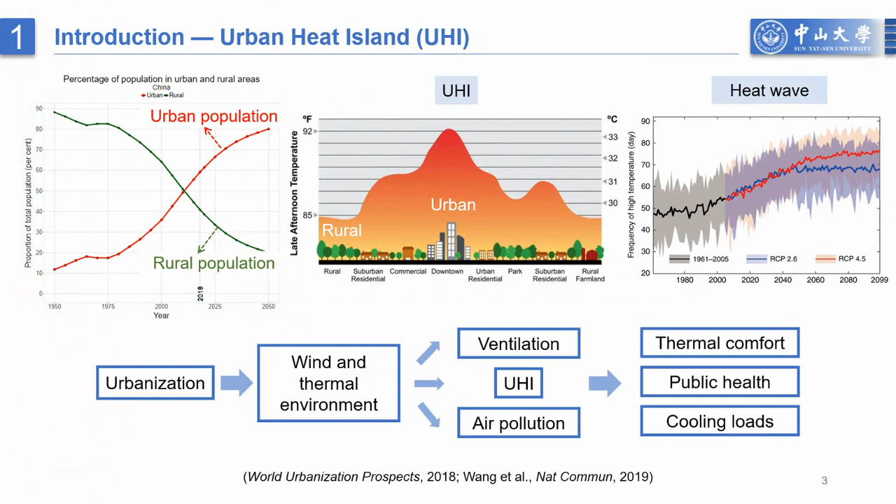I will start from the background. Because the seminar is about urban heat mitigation, you may know the background very well. Here I want to emphasize the impact of urbanization with the increasing population, which not only increases the urban temperature but also decreases the urban wind. The urban heat island also increases the frequency and the intensity of summer heat waves, which decreases the thermal comfort in urban areas and increases the building cooling load at the same time.

Then how to mitigate the urban heat island? Increase shading, increase the urban ventilation, increase water availability, planting trees. All of them have the potential to mitigate. In this study, they want to know how the cool surface mitigates the urban heat island, specifically the cool wall and the cool roof. The cool materials refer to the materials with high solar radiation reflectance and high emissivity, which allow them to absorb less short-wave radiation and emit more long-wave radiation.

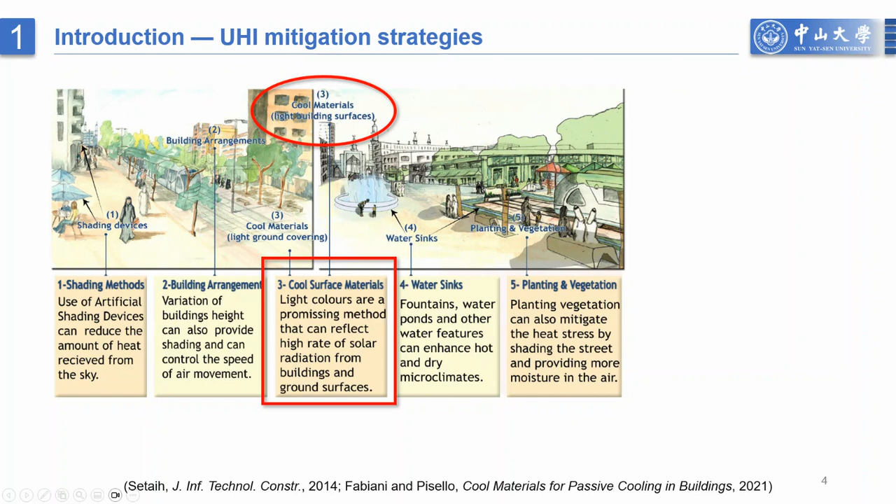Many previous studies have shown that the cool materials can reduce the air temperature, but by how much? And most of them emphasize cool roofs only, while for high-rise buildings, the effect of the cool roof is just not enough. So this study focused on both cool roofs and cool walls. Particular attention was on the deep street canyon. The low-level building walls are sheltered from direct solar radiation, thus applying cool materials at the low level of the building may not be necessary.

They further investigate the partially cool-coated wall, including about 25% cool wall and 50% cool wall in the upper level. Three different times were considered, including 9 o'clock in the morning, 12 noon and 3 o'clock in the afternoon. And they also investigate two street canyon aspect ratios, a typical one with aspect ratio of 1 and a deep street canyon with a very large aspect ratio of 5.

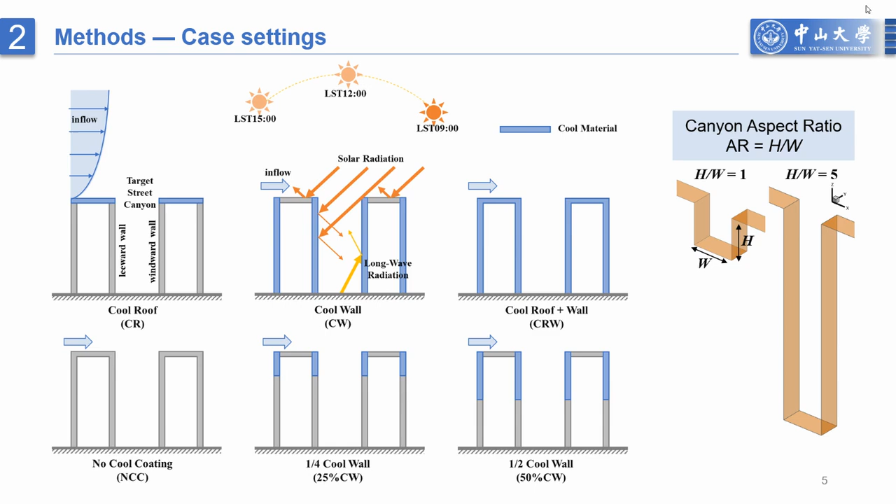They use ANSYS Fluent to simulate the wind and the temperature field in idealized 2D full-scale street canyons. The computational domain is shown in the figure at the left side. The width of the street canyon is about 24 meters, and the distance from the building roof to the domain top is about 120 meters. The turbulence was solved by the standard k-epsilon model in this study, and the radiation was solved by the P1 radiation model. The position is Guangzhou, China, and the simulation time is September, which is autumn in China.

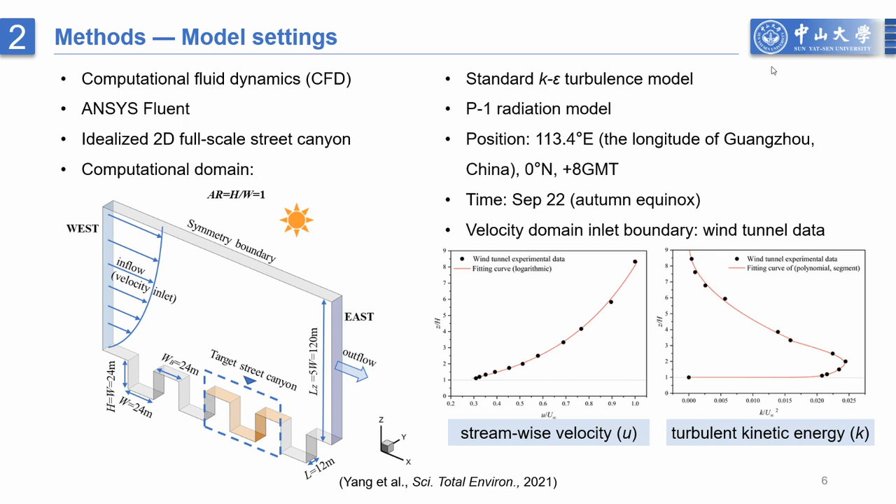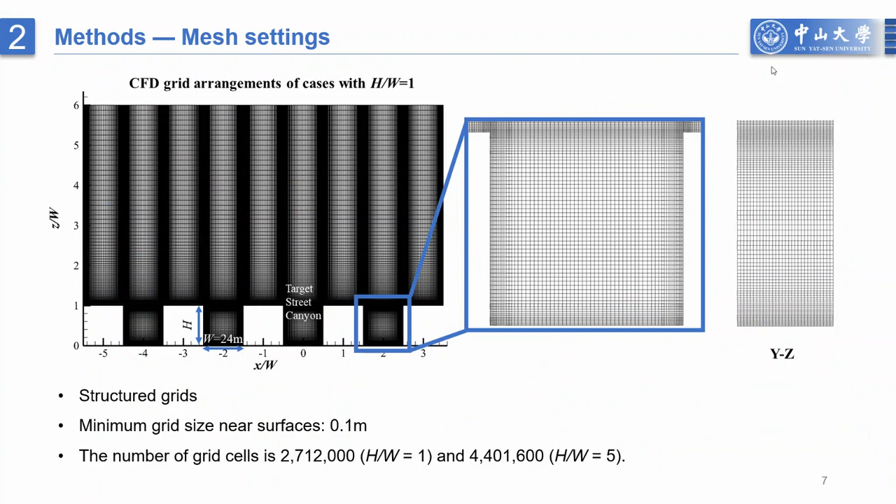For the velocity domain inlet, they use the atmospheric boundary layer for the velocity and for the turbulent kinetic energy. And they use a very refined mesh, particularly in the near-wall region. The minimum grid size near the building and the ground surface is set to about 0.1 meters because they want to capture the small variation near the walls. In total, 2 to 4 million grids were used in this very simple model. This table lists the physical properties of building and ground materials applied in this study. The thermal properties are from the scaled outdoor experiment I will show you later. They mainly change the absorptivity of the material to change the access of solar radiation to the cool materials.

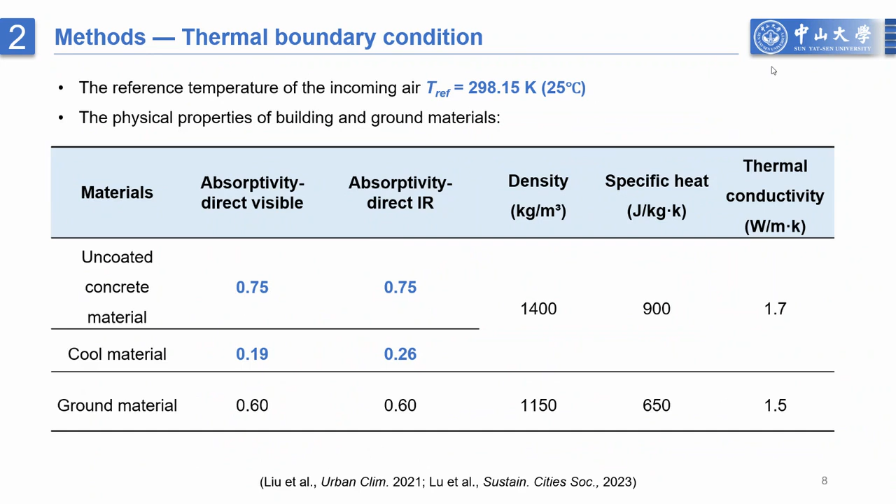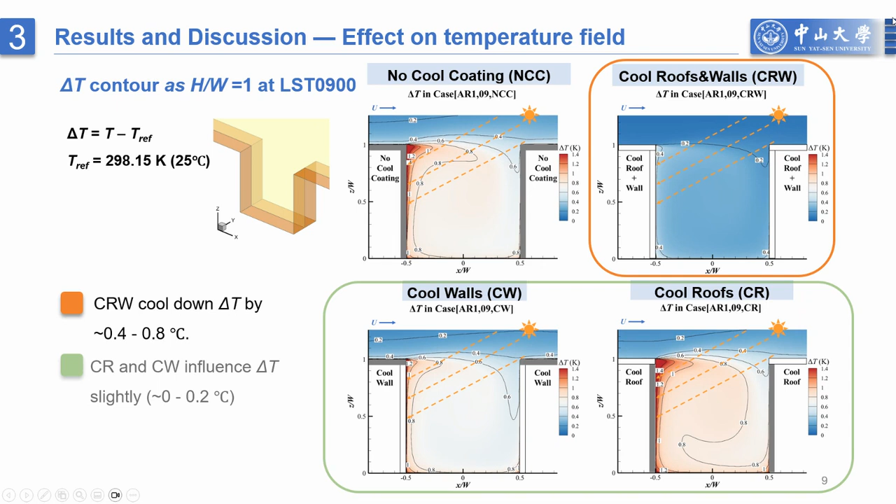So this part shows the results of the simulation. These are contours of the in-canyon air temperature. In the case with aspect ratio of 1 at 9 o'clock in the morning, compared with the no cool coating cases, the benchmark cases, when we use cool materials at both the roof and wall, the air temperature will decrease by 0.4 to 0.8 degrees, while when we only use cool roofs or cool walls, the cooling effect is very small, and when we combine them together, they are not as good as cooling both walls and roofs at the same time. Sorry.

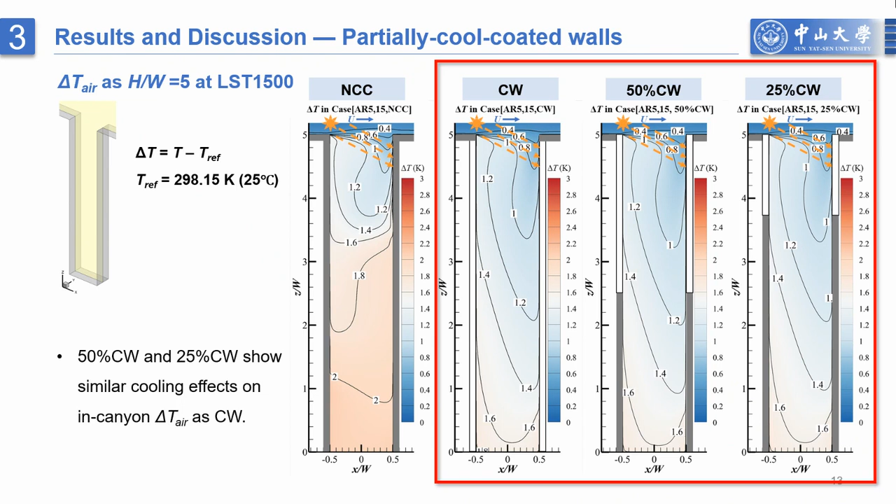For the very deep street canyon with the aspect ratio of 5, it can be seen that the cool wall only decreases the surface temperature of the wall that is directly heated by the solar radiation. But as the street canyon becomes deeper, the proportion of the area directly heated by solar radiation is smaller. So they further investigate the cooling effect of partially cool-coated walls. That means in the wall, some area is painted with cool materials, some are not. And we can find that compared with the no cool coating case, the 50% cool-coated wall and 25% cool-coated wall both show a similar cooling effect on the in-canyon air temperature as the entire cool-coated wall.

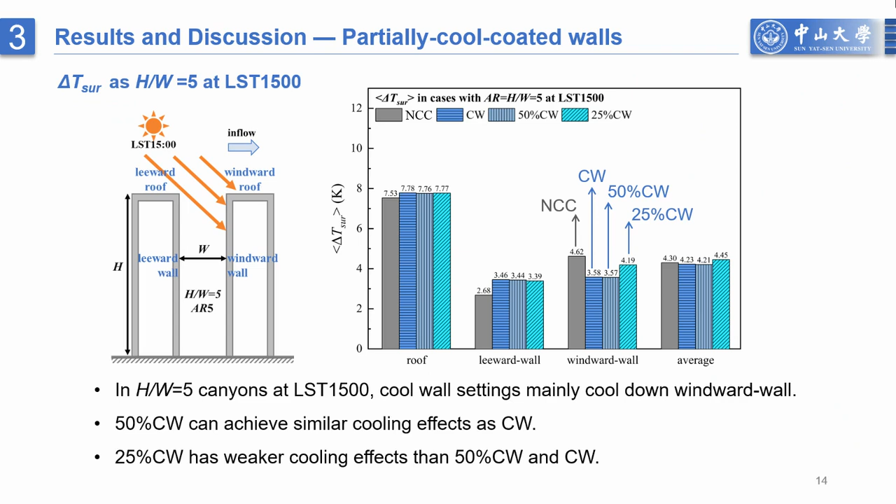The figure shows that in the deep street canyon at 3 o'clock in the afternoon, the cool wall settings mainly cool down the windward wall, and the partially coated wall can achieve a similar cooling effect as if we cool all the surface from the top to the ground level.

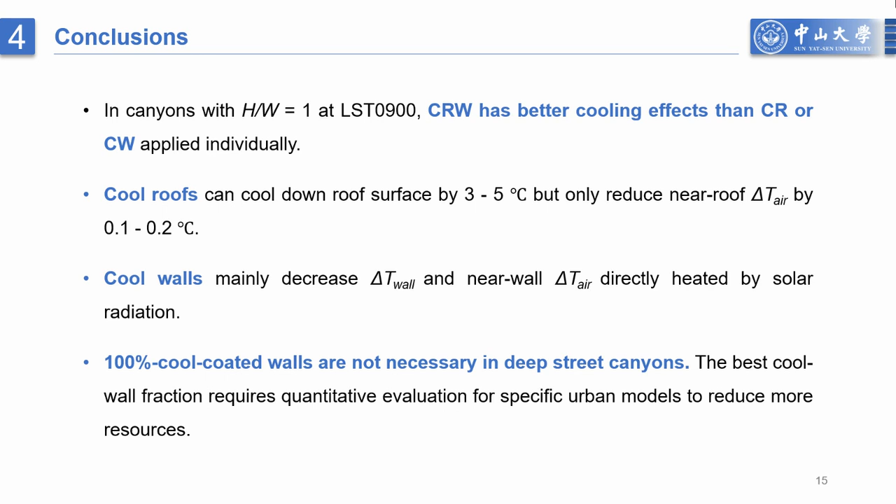Okay, here comes the conclusion. Coupling cool roofs and cool walls has a better cooling effect than just cool roofs or cool walls individually. Cool roofs can decrease the roof surface temperature by 3 to 5 degrees, but only slightly decrease the near-roof air temperature by 0.1 to 0.2 degrees. Cool walls mainly cool down the wall surface and the near-wall air around the area directly heated by solar radiation. And the entire cool-coated wall is not necessary in a very deep street canyon.

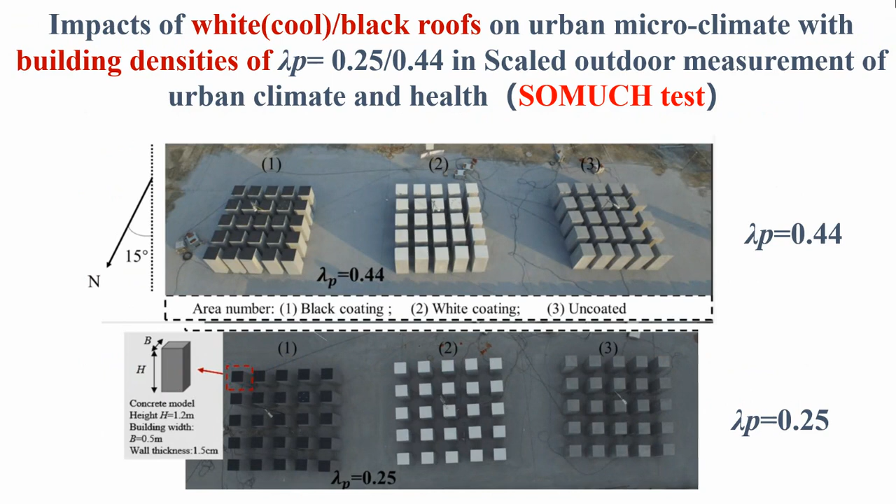Okay, that's the conclusion. They also conducted a reduced-scale measurement to investigate the impact of cool coating on the outdoor air temperature. If you are interested in that study in the outdoor field measurements, you can find more details in this paper.